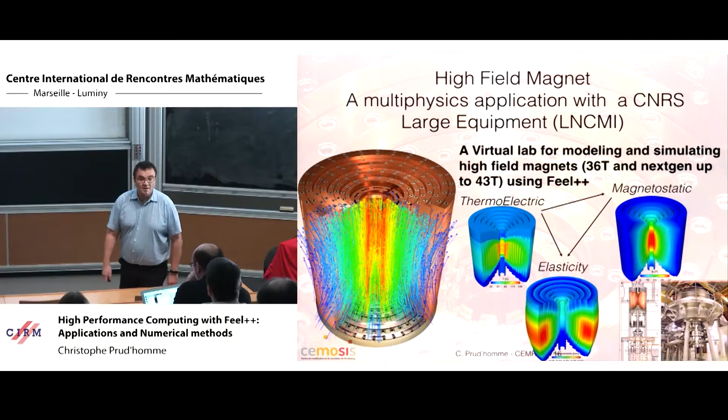We are at the limit of what we can do with materials currently. So we are at the limit everywhere. And so we try to make the most of the design and help them with uncertainty, which are inside the design. So what we've built so far is different kinds of models.

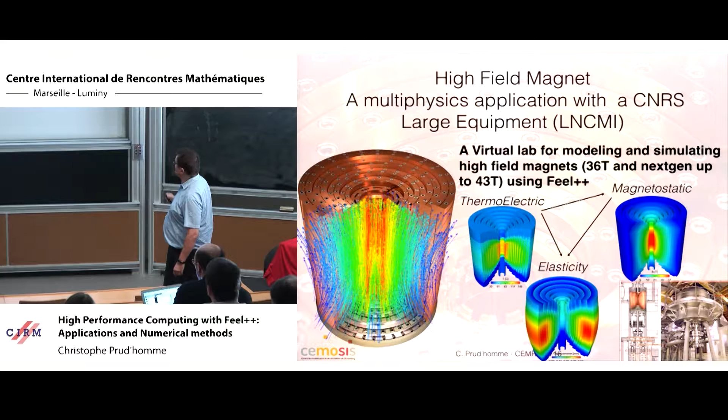So here, at the beginning, they were mostly using analytical or axisymmetric models, but now we have brought 3D models for their magnets. We have, in terms of geometry, from simple geometries to almost the full housing of the magnet. So that's what you saw here. This is the full housing of the magnet. This is the magnet, but its inside is kind of, this is really big. The magnets are not that big.

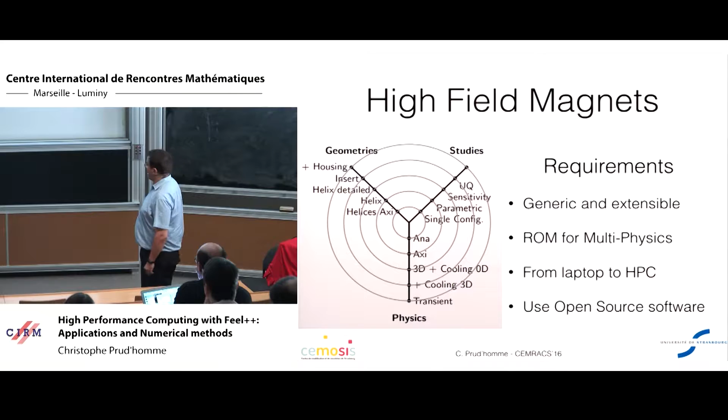And you want to do different kinds of studies, from simple parametric study up to robust optimization that will cost you a lot. Here, UQ, this kind of thing. Okay. And so there are various requirements that were asked by the lab in terms of development. So how does that work?

You put some current in these magnets. The current goes through the resistive magnets. Then with Joule effect, you have temperature increase. You cool this down by putting some water inside those holes. The current modeling actually for hydraulics is relatively simple. It's 0D models done through the thermoelectric model with boundary conditions that handle the water flow.

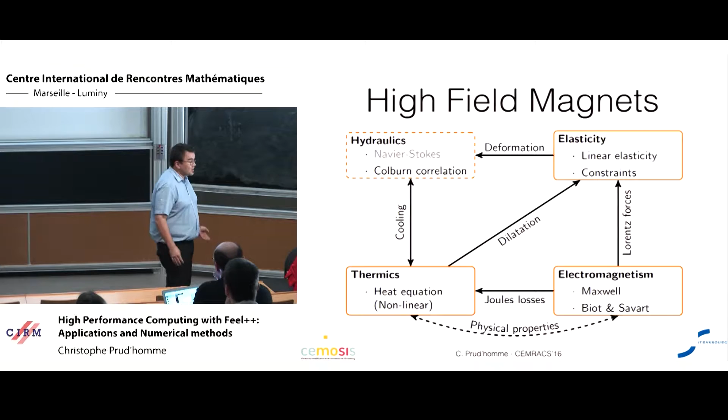The thermal load induces dilatation for the elasticity part. But when you put the current inside the magnet, you also have a magnetic field which is generated here. The magnetic field induces forces on the mechanical part, and the dilatation from the thermal load also induces forces on the mechanical part. All these models are non-linearly coupled.

Okay. In order to achieve that, we build a framework which is based basically on the de Rham diagram to move data or information from one approximation to the other. So we work with H1, HDiv, HCurl, L2 approximations. And in Feel++, in particular, we made sure to provide relatively seamless operators that allow to go from one to the other in an efficient, seamlessly parallel way, and doing that in a mathematically correct way.

What is a little bit more complicated is the geometry. It actually took us more time to make the geometry rather than solving the equations. You have more than 300 geometrical components inside. Maybe you see here there are some cuts inside the magnet. These cuts are done in a block of copper, but it's not really ordinary copper. This is a special copper that can handle the thermal load and the magnetic loads on these magnets.

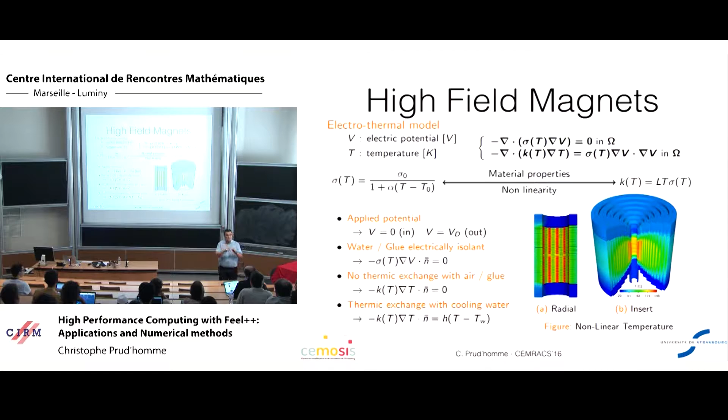And with electroerosion, I have no idea in English how it's called, they are cutting through the magnets. That makes this geometry, and in order to avoid electrical arcs between the various cuts, they put some insulation components. Okay. So this is how we solve for the temperature and the potential.

Then we have two ways to solve for the magnetic field. There is a very important field for this magnet. It's the magnetic field seen by the user, the experimentalist. The user would like to have control on the magnetic field, a very high quality. He wants to be able to do his experiment with controlled accuracy on the magnet. And they have devised various experimental measurements. And here we actually have developed a little tool that allows to compute the magnetic field with Biot-Savart.

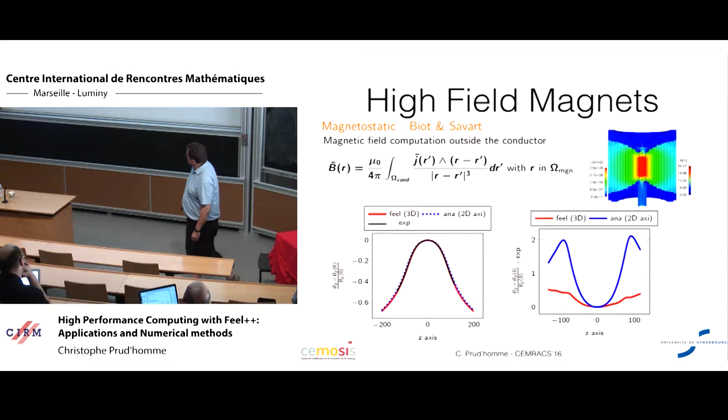Another way to compute the magnetic field: this time we want to have the magnetic field everywhere in a domain of interest and also in the conductors, because we will want to then pass this information to the structure mechanics. So in that case, we go to the magnetostatic equations with two kinds of formulation, a regularized one and a saddle point one.

Recall that since you have to solve this equation for the potential vector, where J is the electric current density, the solution you obtain is up to a gradient of a scalar field. So in order to ensure unicity of the solution, either you add the regularized term, or you introduce an extra constraint: you impose that the divergence of the magnetic potential is actually 0.

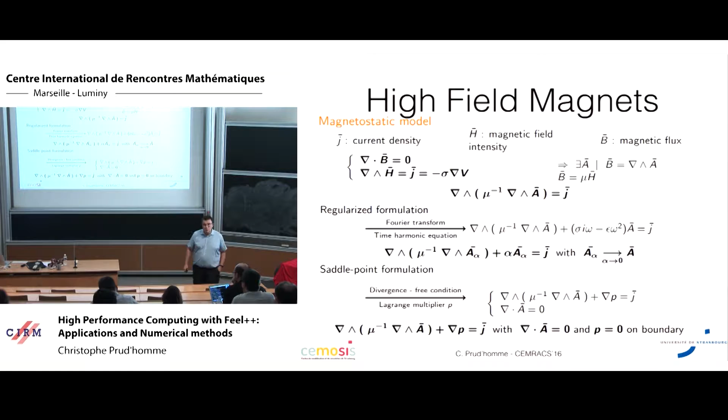Okay. In order to solve that for this kind of geometry, you need a very, very efficient solver, and you have some work by Hiptmair. Hiptmair developed auxiliary space preconditioners for this kind of problem, which provide an efficient way to solve this kind of problem. But actually, the setup is not quite trivial. You need some work, but you have some very efficient implementation available by the American labs, particularly the people from Hypre.

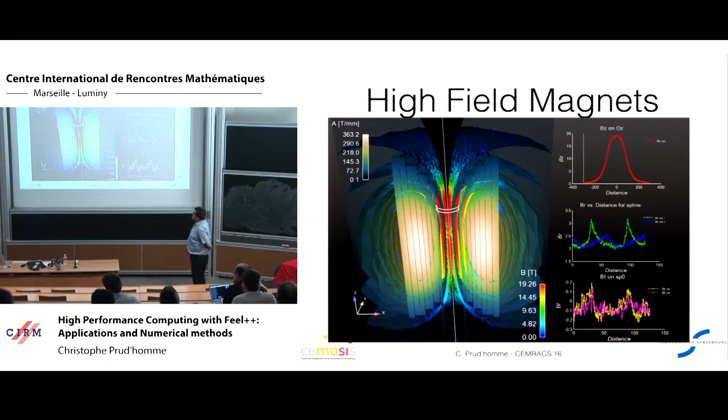The next step is for the structural part. So we solve here the elasticity equation. We have a relatively simple model where we include both the Lorentz force plus the thermal load in order to compute the displacement inside the magnet. And we have Tresca and von Mises indices, which allow us to verify if the magnet is going to break or where it's going to be sensitive.

So all these models, for example, are used to design the magnets, but they are also used to make post-mortem diagnostics. Sometimes they break magnets, and they are used to actually understand what the problem was and what occurred in the magnet. Okay, so we have this big model, coupled nonlinear physics.

Now the physicists, the engineers would like to use this model not only in the R&D office, but also outside. For example, they would like to make the calibration of the magnet. They would like to characterize the magnet, and in order to do that, they would be very happy to have access to, let's say, the simulation tools. But of course, simulation can be difficult to bring outside R&D offices.

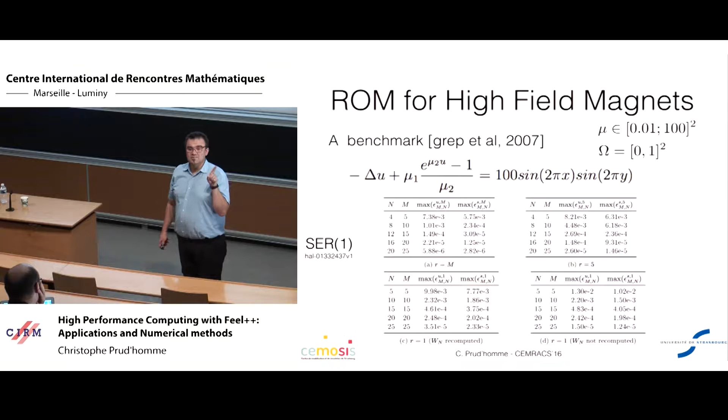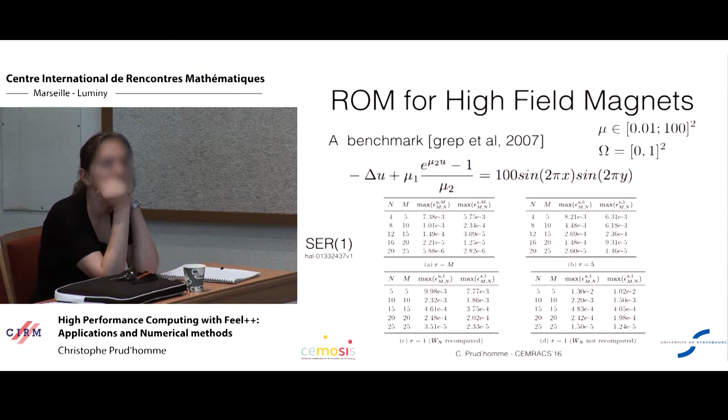So here, if n is the number of basis functions in your reduced basis space, we have had only n plus 1 finite element solves for the SER algorithm. So here you have 26 finite element solves that were actually the n. By recomputing the finite element solution, you gain a little bit, but not that much. So it's actually quite good.

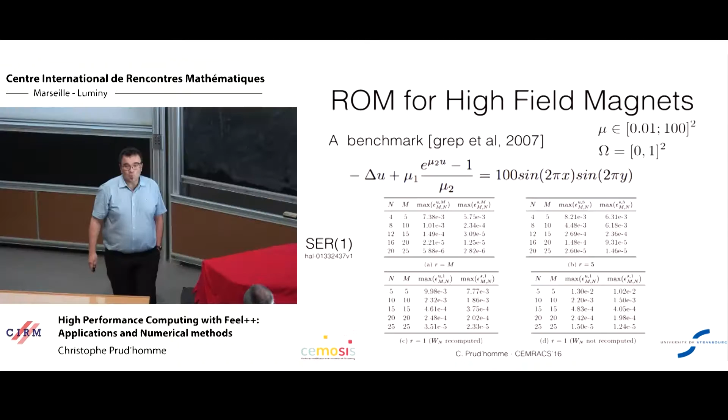So I call it SER1. In the first article, it was only SER. Why SER1? Because now we have SER-L, so multi-level SER. So the thing is that if you compare now, this is here the convergence rate for the greedy algorithm of the EIM algorithm. This line here is the convergence for the SER1 algorithm.

Here you have the convergence for the standard and the higher level SER algorithm. And you see that we recover, by just applying SER a second time, we use SER1 in the greedy algorithm. So now we have a good and fast approximation for the solution of our model, and we use it in the greedy of EIM at the next level. And it improves, in a very nice way, the convergence rate.

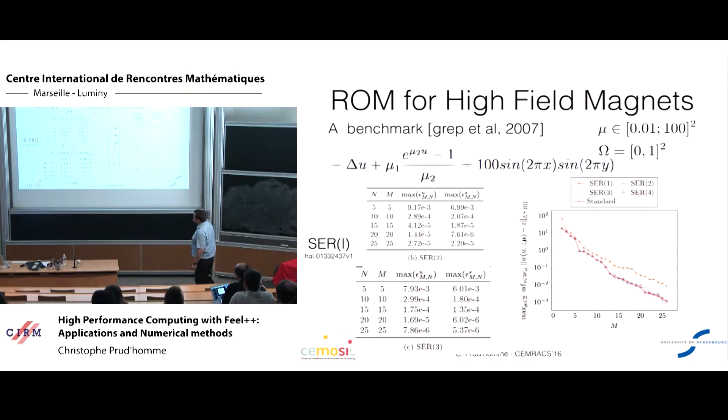And here you have SER2 and SER3 for the error on the U and the output. So this is quite good. Now we have applied this algorithm to our high-field magnet application. In this case, we used only a piece of a so-called Bitter magnet, which is used almost everywhere in the world, and it was developed by an American engineer.

So here you have the holes where we have the fluid, the water going through. So you have the setup of the model here. And you see the result of the SER algorithm, first that it converges, and here you see SER1 here for EIM, and here SER2 and SER3. Quite interesting result. At least it improves in a nice way the results.

So this technology, the reduced basis technology, we implemented it into Feel++, and we have now a framework in order to do real-time simulation. So we have built, this is one application, so this is the Bitter magnet that you see here.

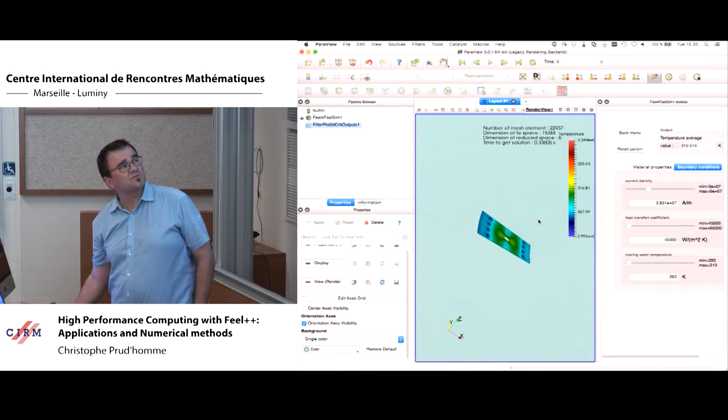This is a plugin into ParaView. ParaView, I think a lot of you know. And on the right here, you have an interface which allows you to change the parameters. So what are the parameters? You have, for example, the heat transfer coefficient, the current density, the cooling water temperature, and here you have the material properties also, which are accessible.

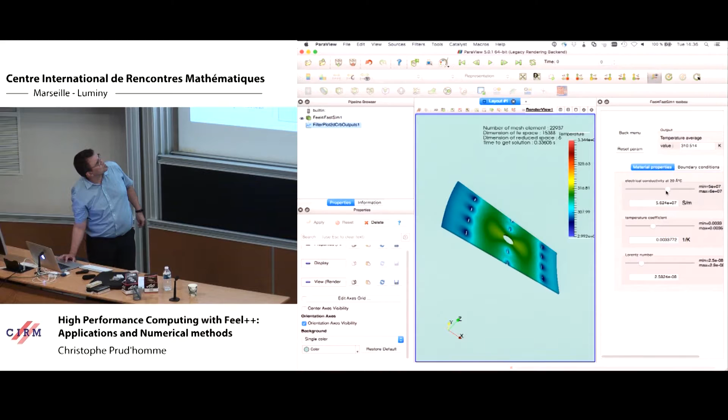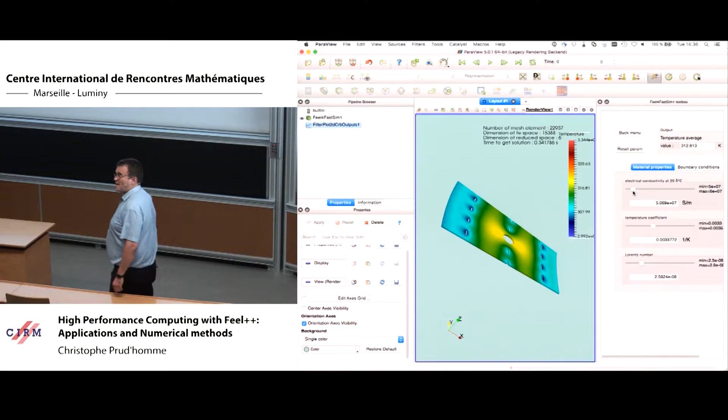So now you can change, for example, these parameters. And as you change this parameter, you see that the visualization, of course, is changing. We are actually doing the computation at the same time, in real time. This is a nonlinear model which is solved here. You can see that it solves in 0.3 seconds, but when Vincent Chabannes is done in the next few days, it should be like 10 or 100 times faster.

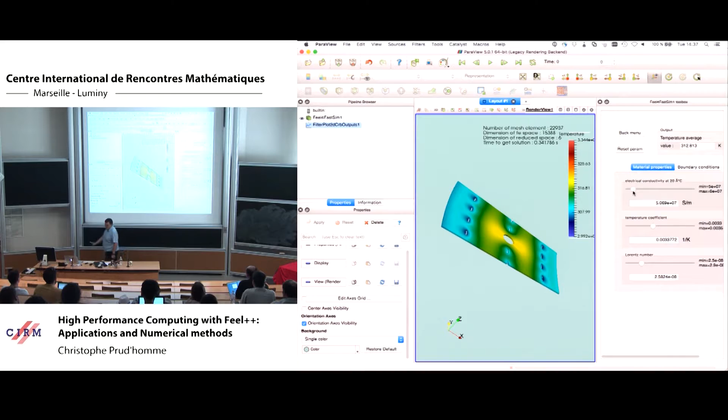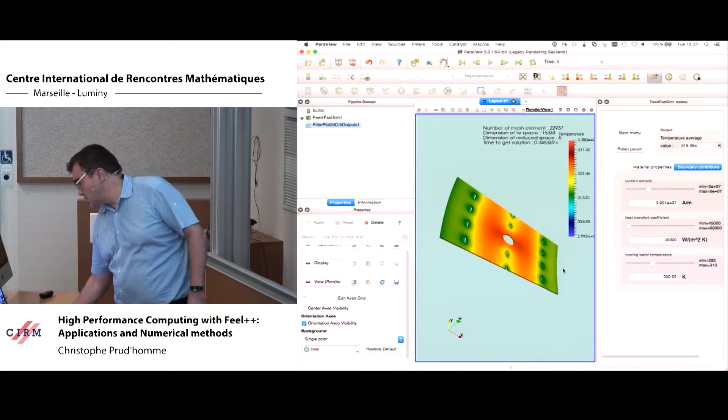There are some small details which are actually complicated to handle, but here you have real-time visualization. Actually, what is costing the most is the visualization. You have 3D visualization here, and this costs quite a bit. Okay, so here you see it reduces the calculation, and you have the plots. You can do that also for different kinds of models.

So, for example, oops, this is not the right one. Sorry. Okay. This is the demo effect.

So now what you see is an apartment with various rooms. You see an apartment with the different rooms, doors. You have here heaters. And what you see is the 3D temperature map inside an apartment, which is computed in real time. In this case, we are actually at tenths of milliseconds, 0.1 or 0.2 milliseconds, to do the calculation. And here you change the parameters.

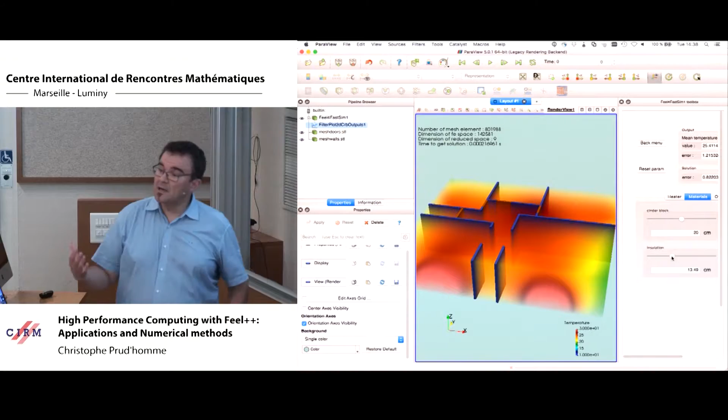For example, here's the heater in the kitchen, or you can change the materials or the insulation of the apartment, the size of the insulation, and you have in real time the maps that are recomputed. So this is for 3D visualization. We have various other examples of this technology.

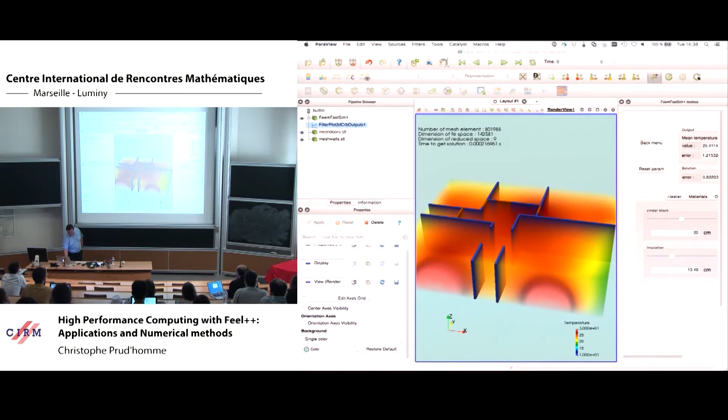Okay, let's get back to the presentation. So this is called FeelFastSim. You can have some information here on the website of Cemosis. We have actually a maturation project at the SAT in Alsace, and we are trying to find industrial partners to develop the technology.

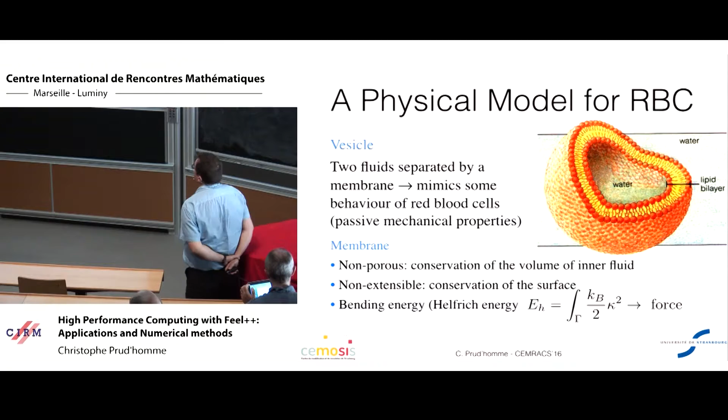Now I go to the biomedical application. So HiFiMagnet will be at the CEMRACS. We have one PhD student working on this, Romain Hild. We're going to change quite a bit, to go to the biomedical application that we are going to work on at the CEMRACS. So here we are interested first in blood rheology.

We have developed this for the last few years with a physics lab in Grenoble called the LIPhy. We had some PhD theses. For example, Vincent Doyeux, who's here; most of the results are from his PhD thesis. And we have a postdoc, Thibaut Métivet, who now took the flame and continues the work. We also have a paper submitted on HAL and to a journal on this in the last few days. So the object of interest here is the red blood cells under flow.

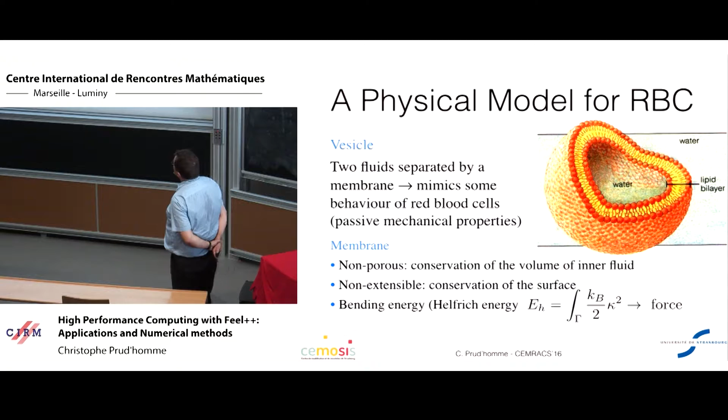So we are interested in modeling those red blood cells for various reasons. The physicists are interested in having some kind of blood constitutive law. And they are developing this model in order to understand, for example, in the case of illness such as sickle red blood cells or anemia, what is the impact on the blood viscosity, and in particular, if with a simple rheology test we can actually diagnose this kind of sickness. Currently, diagnosing blood illness is costly and takes time.

The idea would be to develop a much faster diagnosis by, for example, testing the blood rheological properties. So here, our model will be relatively simple. In the CEMRACS, we are going to work on something a bit more complex, but here we are interested basically in a two-fluid problem separated by a membrane, which will be the membrane of our red blood cell. And this membrane has some properties. First, it's non-porous, it's non-extensible, and it requires energy in order to bend it.

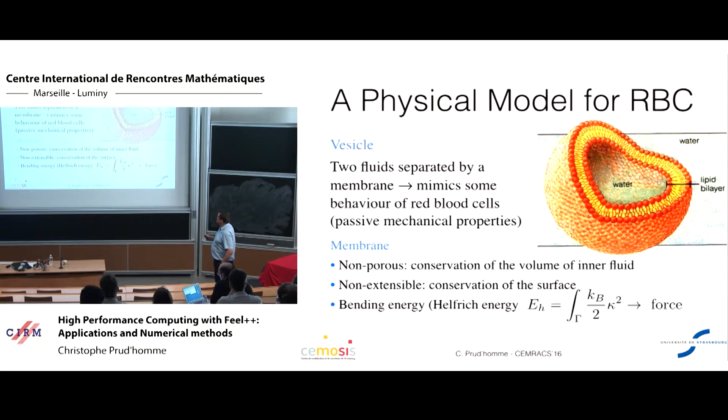Here, kappa is the curvature of the membrane. In order to do that, we use a Level-Set framework. Just to recall, for the Level-Set framework, we need a so-called signed distance function, which is positive outside the domain drawn by the membrane, negative inside the domain, and 0 on the membrane boundary. From this signed distance function, you can recover the normal and the curvature.

Under flow, you will have to solve for an advection equation for the distance function, which is advected by the velocity of the fluid. And for the fluid, you solve for the Navier-Stokes equation. Well, in our case, it's more like the Stokes equations. This is more like in the Stokes regime.

And the signed distance function allows you to define the viscosity and the density parameters of the Navier-Stokes equations using the Heaviside function, which is derived from the signed distance. With the signed distance function, you can also easily define surface tension, gravity, bending forces. Okay.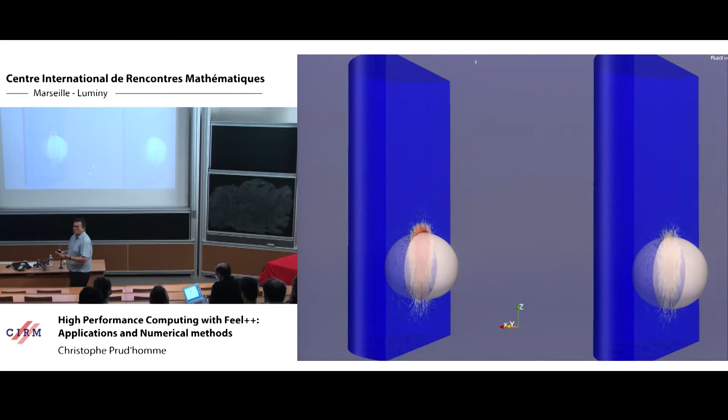A specificity perhaps that is of interest in Feel++ is that with the signed distance function, you lose the distance property of the phi function. And in order to recover it, you need either to solve, for example, the Hamilton-Jacobi equation, or to apply some fast marching method.

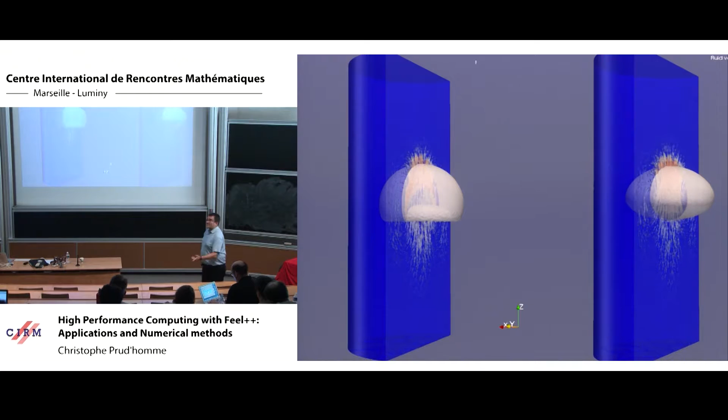Fast marching provides some pretty good results in terms of accuracy, but it's essentially a sequential algorithm. So you need to parallelize it, and we did it in Feel++. You don't have any gain in parallel, but it works in parallel with the rest of the framework. So there are various comparisons between the two alternatives in the paper. It's quite interesting. Another thing is that we also use high-order approximation for the level set.

Now, if we go for the red blood cells, well, this is some work which is quite old already by Vincent Doyeux. Here you have some videos done by experimentalists at the LIPhy laboratory, where they are actually interested in the vesicle or red blood cell in shear flow, where you have a high contrast of the fluid parameters inside and outside the vesicles. And in that case, the red blood cell is going to tumble. And with the model that was developed for the red blood cells, we managed to recover the tumbling effects.

You can have also the case where the viscosity contrast is not so high. You don't have the tumbling effect, but rather the tank-treading effect, where the red blood cell is actually turning on itself. So we recover this, so it allows us to validate our model for the red blood cells on a simple case.

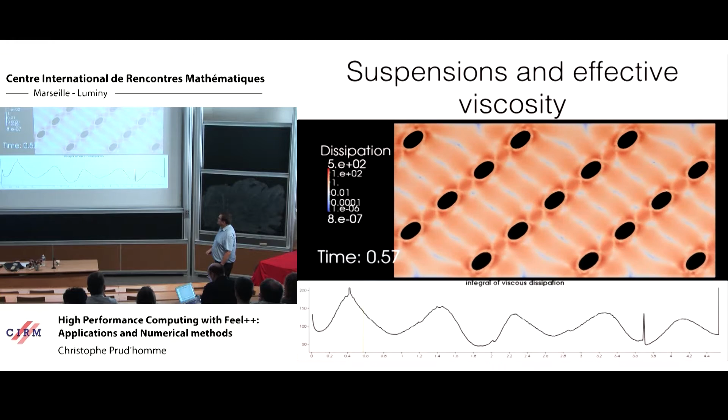Another experiment is to be able to compute the effective viscosity of shear flow with various red blood cells. You have a periodic domain here, and we compute the viscous dissipation over time of this array of red blood cells.

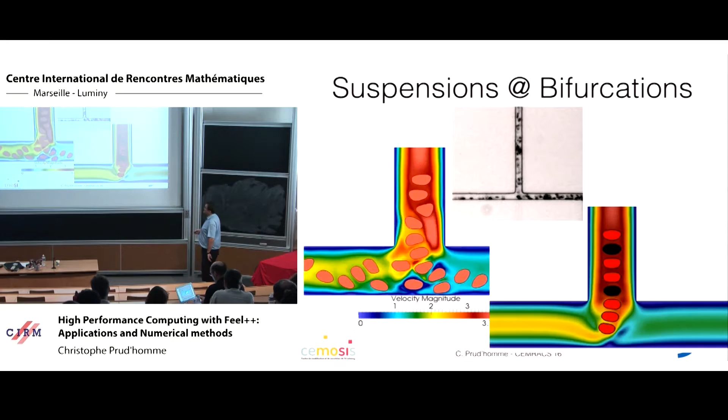So this is a part of a project that we have here at CEMRACS. It's just starting. As mathematicians, we are not doing this kind of experiment. This is the job of a group of biologists led by Jackie Goetz at INSERM, and Sébastien Harlepp, a physicist at IPCMS in Strasbourg.

They are doing in vivo and in vitro experiments to understand the impact of hemodynamics on the attachment sites of tumor cells in the vascular system. And they are now interested in in silico modeling and simulation of this. So we are starting to work on this at CEMRACS, and we'll see what we can expect.

In terms of experiments, the good model is actually a zebrafish. Zebrafish is an interesting model because it's transparent, so you can optically see through it and follow things. Here they put nanoparticles inside the zebrafish and follow the bloodstream inside the system. They have all kinds of experiments where they follow tumor cells inside the system,

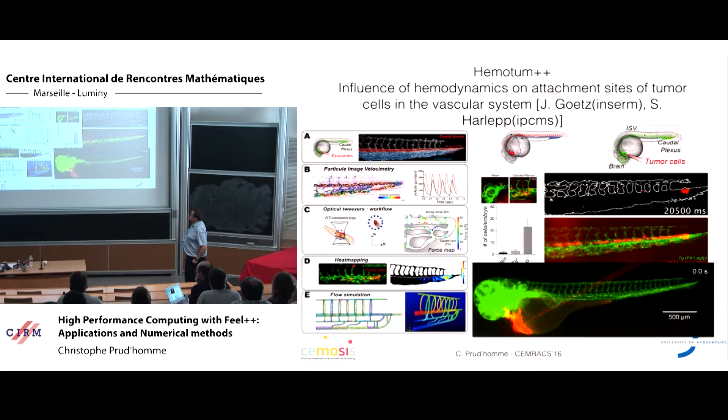So in that case, we are going to have CFD plus level set for the tumors, red blood cells, and possibly also compliance of the arterial walls. So we are going to put a lot of technology and methodology in this.

The last kind of application we are working on is the project VIVABRAIN, funded by the National Research Agency, where physicists, mathematicians, and computer scientists work on this loop. We start from MRI images, we reconstruct the vascular system, venous and arterial, then we simulate the blood flow inside the system, and we model the MRI virtually to reproduce virtual angiographies

of the brain flow. The interest here is that we would like to be able to validate the whole software tool chain for the reconstruction. So it's quite a bit of work. In our case, we are involved in the blood simulation, but we also take care of the whole tool chain at Cemosis. And you'll see that we managed to build almost the full pipeline from MRI images here.

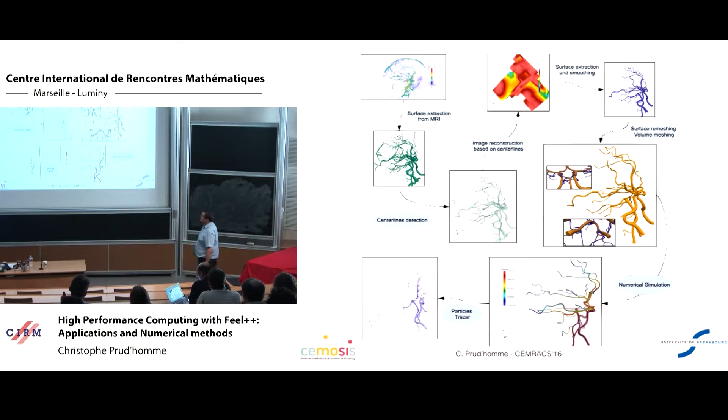We have a set of sequences which allow us to go from these images to computational meshes and simulation, and the last loop is being worked on, but not yet integrated into the software pipeline. This pipeline is called AngioTK. You have a version available on the web, but it's rather old. If you are interested, contact us, and we'll see how to integrate you in the project. It will be available freely at the end of the project.

We have a lot of data, also medical data from MRI, about 40 patients who went into the machine. I'm one of them. It was interesting. We don't have access to pathological people, it's only physiology. So the first part is to apply some filters that allow us to extract the vessels, the structures that are the vessels.

The next step is, oops, I don't put all the steps, I'm missing some steps, sorry. Well, then we have various stages which allow us to extract the vessels, then reconstruct them with a nice surface. So you see here the meshes are actually quite nice. And we do the simulations. You see here some streamlines.

But in the process, there are quite a few difficulties. Here, for example, is what the mesh looks like when you do the first extraction. You see that this is not usable by computational codes. You have holes everywhere, the elements are in very bad shape, you have this kind of thing here. This is maybe nice for visualization, but not for computation.

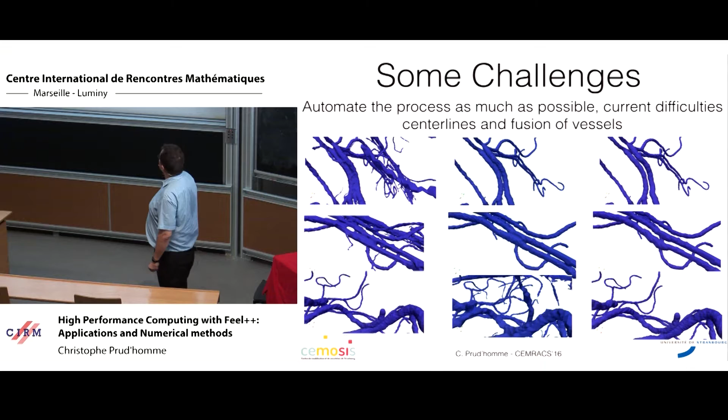But there are issues, for example, where you have vessels which are merged. You need to be able to detect that. So for example, here, the vessels are merged. And so you don't know if it's a bifurcation or if it's actually two vessels. And so we have an automatic way to detect this and to produce a proper segmentation. So here, this is without doing anything. Unfortunately, we have this connection between the two vessels. And here, we managed to cut this.

So in the end, we managed to produce the venous and arterial network. And you see that the difficulties were in this part where you have the two vessels. I don't see it anymore. Here, in this area. Okay. And then automatically, in an easy way, you can simulate blood flow inside the arterial or the venous system.

Our idea is to actually do the full system, venous and arterial, but we need to provide a model to handle, let's say, what's between the arterial and the venous system. So we need some modeling now in order to make the link between the two. And actually, with Marcela Szopos and Vincent Chabannes, we published also a paper on the influence of modeling choices for the cerebral venous network.

There is a lot of work on the arterial system, but relatively little on the venous one. And it's very hard to find data in the literature. So we took as much as we could, and we did various experiments to understand the impact of the various choices. Well, I won't go into the details, but in this case, actually, the post-processing was as costly as the actual processing. We had computed various sensitivity indices, which cost a lot, in order to understand the impact of the various choices. Inflow is, of course, very important, but also outflow and also Newtonian versus non-Newtonian. There are various other checks inside the paper.

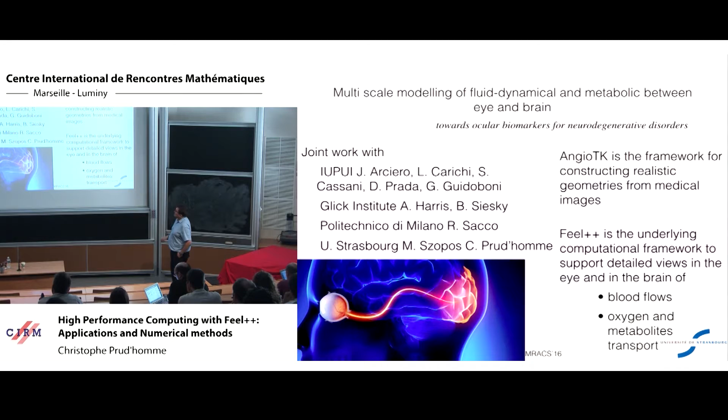Okay. So this is a multidisciplinary work, and we have a PhD starting in September, Lorenzo, who's going to work on the eye and a full 3D model of the various flows inside the eye, but also the mechanical part. Now I realize that I'm reaching the end of the talk.

In order to do all this, we build on Feel++, which is an open source software which allows you to use Galerkin methods, continuous Galerkin, discontinuous Galerkin, from 1D to 3D, but also on manifolds: surfaces, edges in 2D, 3D, or surfaces in 3D. Seamless parallel computing, so we want to hide this part, so end users who are physicists or biologists just want to see the models.

And of course, you need interpolation tools. We use many grids in complex applications, so you need to be able to pass information from one grid to the other. And this is a workhorse: you need to have powerful solvers. In the beginning, we had both Trilinos and PETSc in Feel++. We didn't have the manpower to maintain both interfaces, so now we use PETSc and SLEPc. SLEPc is for eigenvalue problems.

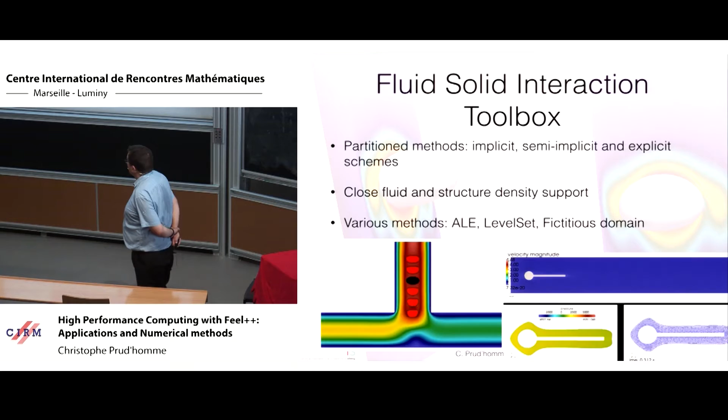Okay, so we have quite advanced use of PETSc. I think Matthew Knepley was here last week to present what you can do with PETSc. It's actually very, very nice. I'm going to skip that. We have various toolboxes which are available for free in Feel++: CFD, computational solid mechanics, FSI. You have advanced numerical methods: ALE, level set, fictitious domain.

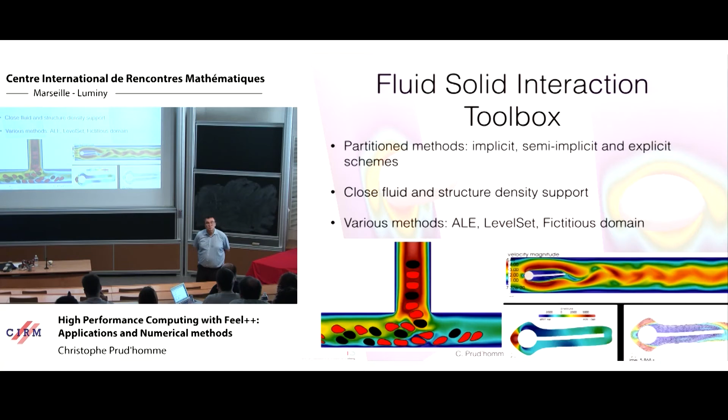So for example, here you have a flow around a flag. So here, this is a fictitious domain. You have a rectangle, and then you have a fictitious domain with an FSI coupling between the fictitious domain here and the Navier-Stokes flow inside. And we use a fat boundary method in order to handle the fictitious domain.

Regarding PETSc, or what we have in Feel++ in terms of solvers: we use, of course, the PETSc preconditioners. We are very happy when direct solvers can be used, like MUMPS, for example. So this is a default solver. But then quite often you have to use all kinds of different strategies.

In particular, I would like to mention the fieldsplit framework in PETSc, which allows you to compose and create very advanced solution strategies in a very generic way. This is an extremely interesting framework. I strongly advise that you have a look at it if you are working with high-performance computing and you need to solve big problems and possibly multi-physics problems.

We have an in-house substructuring preconditioner, in particular work by Pierre Jolivet and Frédéric Nataf, Frédéric Hecht, which is coupled with Feel++. And also we have developed an HP mortar framework for elliptic problems. We also have some Navier-Stokes block factorization preconditioners which are wired in. We have a lot of Navier-Stokes applications, so you need very fast solvers.

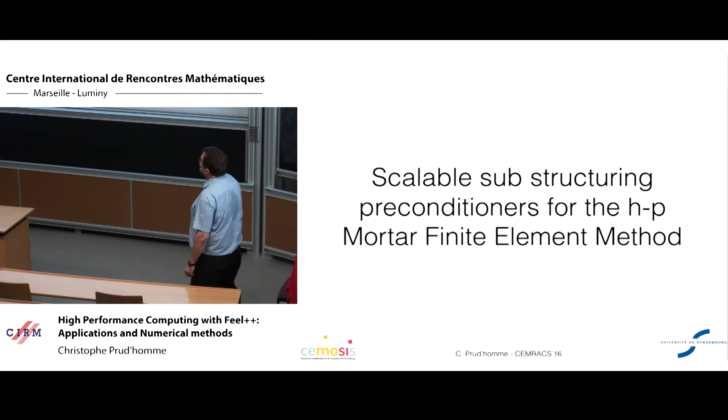Okay, well, Yvon and Tony are here, so I put some slides for the mortar, but I think I'm at the end of the talk, so I need to skip that part.

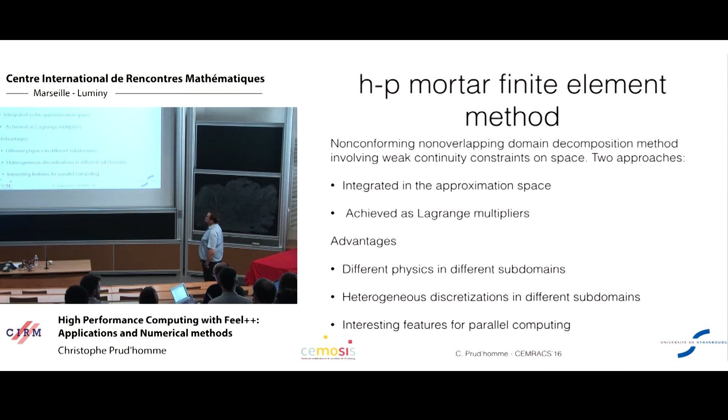Just to say that for this work, we managed to develop a very efficient and scalable solver with very good properties. But the work is only in 2D so far; we are working on 3D. This is joint work with Silvia Bertoluzza, Micol Pennacchio, and Abdoulaye Samake, who did his PhD on this. There is a nice theoretical result on this, but we showed numerically, at least on the tests we did, that the preconditioner was behaving much better than in the theoretical case.

Here, this is the behavior of our preconditioner. This is the condition number for our problem. It's HP, so it depends on H and P. Here big H is the subdomain size, P is the polynomial order, and this is the local mesh size. And here, numerically, we see only the dependence on this. We don't see this dependence at all, so it doesn't grow with the polynomial order.

But unfortunately, from a theoretical point of view, we cannot remove it. It comes from the mortar projection here. But so far, we have not seen the impact from the numerical point of view. We have made various tests: speed-ups, weak scalability, strong scalability, and the preconditioner behaves in a very nice way.

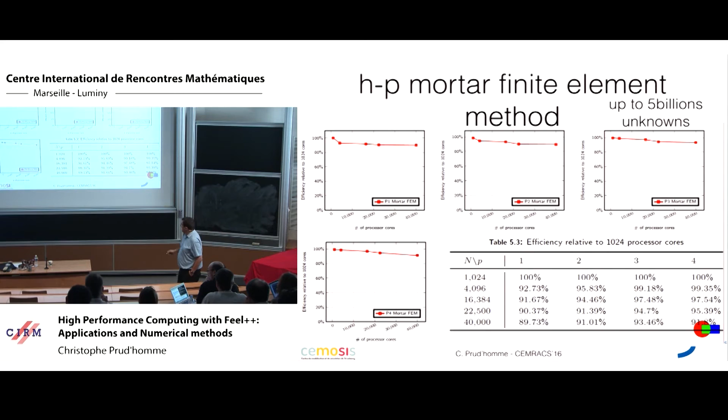The last, but not least part: we started working on HDG methods recently. So we have started to support HDG methods in Feel++. We already had DG, but HDG requires a few more features from the computational point of view.

Just as a reminder, HDG provides various advantages, in particular optimal approximation for the primal and flux variables. You don't have any penalization parameters, so it's much better for tuning. You have fewer coupled degrees of freedom, thanks to the introduction of a Lagrange multiplier for the traces. You have superconvergence properties that you can recover with post-processing once you have done your solve.

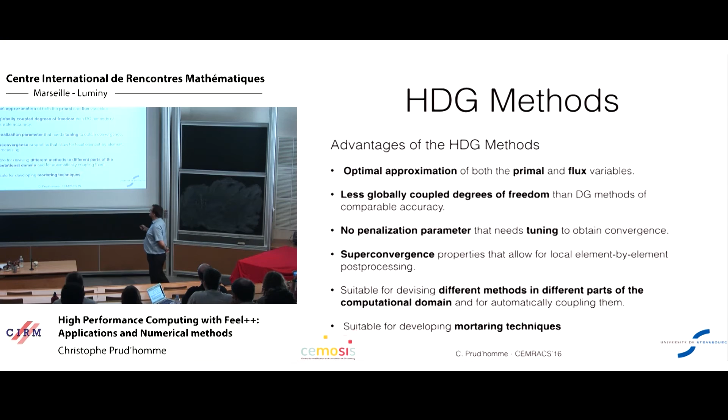It's open to mortaring techniques and allows for different computational or approximation choices. The idea is to rewrite the problem as a set of local problems in each element, and to introduce a trace of your primal variable, which is going to uncouple the approximation in each element.

And then we have transmission conditions, which are set globally, but in a weak sense, in order to solve the global problem. Our contribution is first implementation, but from a theoretical and numerical point of view, in our applications, in particular the high-field magnets and Eye2Brain, we have integral flux boundary conditions.

So we need to set integral flux boundary conditions, and we have proposed a framework for that, proved the well-posedness of the problem, and it's going to be presented at a conference at the beginning of October, at IHP in Paris, for a semester of applied mathematics at IHP. So we are going to present that there, but we already have the results here.

So we have some convergence plots. Here we have only one for P1 in 3D, because we don't yet have static condensation for HDG, where you eliminate local degrees of freedom. Unfortunately, this feature is not yet there, but this is the work at the CEMRACS in order to improve the performances. So this is what we are going to work on for HDG here.

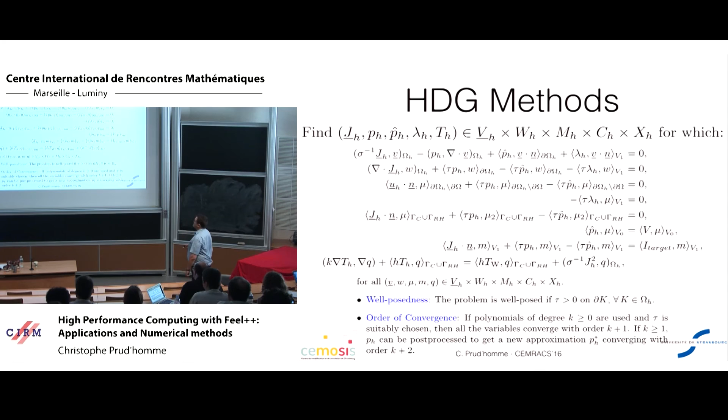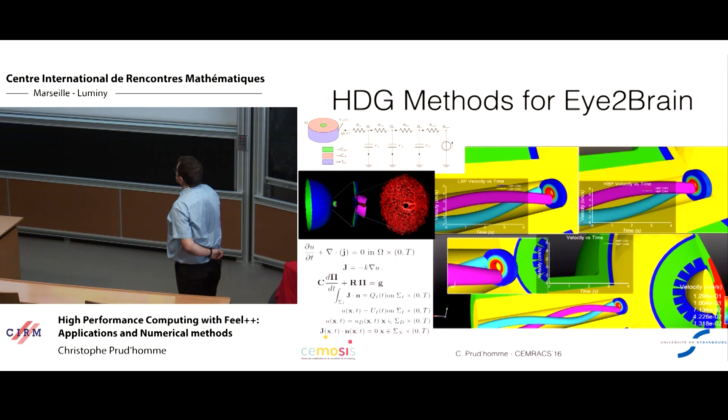Just maybe a small remark. The electric models here are done with OpenModelica. For those who don't know OpenModelica, if you are doing systemic modeling coupled with 3D or other kinds of models, OpenModelica is extremely interesting to develop the 0D models. This is used in industrial applications a lot.